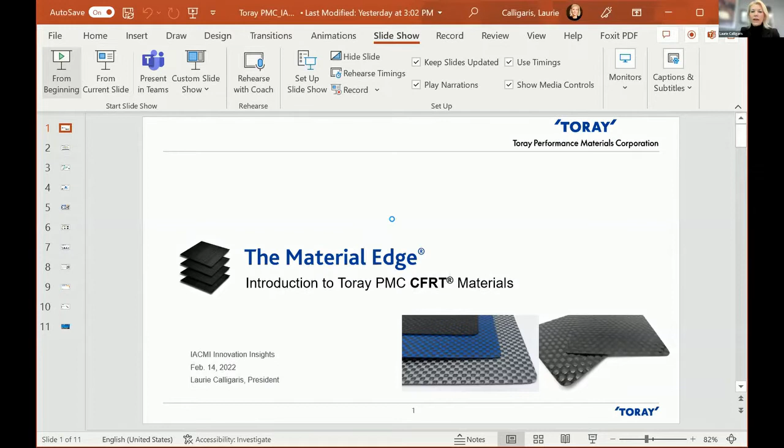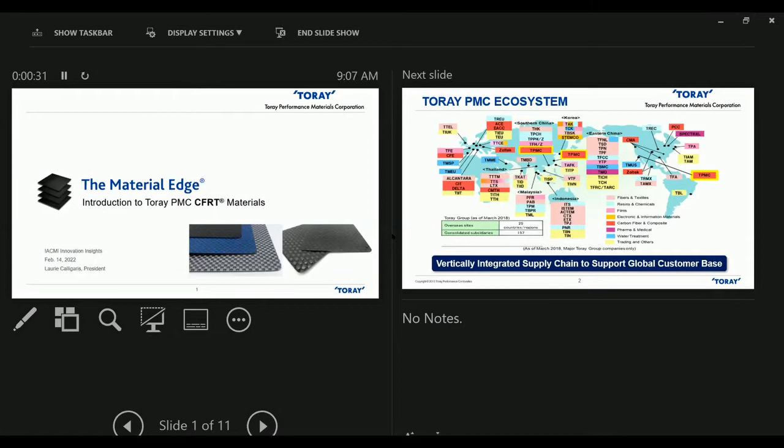Here we go. All right. Okay, how's that? Might need to either duplicate your slides or swap. We're still seeing the main, your edit screen. Hold on, I've got my technical expertise here.

We do this day in, day out. I don't know why it's a little bit different here. At the top of your screen you have a thing called display settings, and if you either duplicate - normally we do, right now we don't. Give us just a second here. Okay, hold on just a second. Page, extend.

Yeah, you blocked your monitor, that's why. You turn that off. What's going on here, huh? This is bizarre. No, it's nothing - it's because you had put the block on the monitor underneath the screen. You see a slash through your monitor on that one on the side. I'll share for just a second. Sorry, guys.

Somebody clicked on that block monitor or blackout. Oh, somebody clicked on the block monitor? Uh-oh, yeah, that's not good.

Not us, but I understand you moused over it and accidentally turned it black, so it stopped showing. All right, give us just a second. So you couldn't see it.

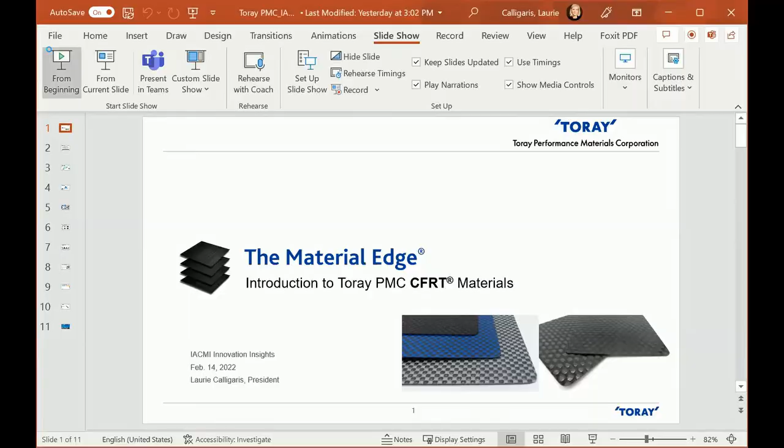I see what happened. Now you can see, hold on just a second. Yeah, you'll have to share again. There it is. How's that? There we go. Ready to go. Woo, finally. Oh my gosh, all right.

Thank you again. We're going to give you a little background about PMC because you're right, Dale, a lot of folks may not know who we are and how we fit in the Toray group. We were acquired about 3.5 years ago by Toray. So as we walk through the presentation, you may have seen or heard of our materials, and I promise you that if you've got kids who are teenagers, they're probably wearing some of our materials on their feet, okay?

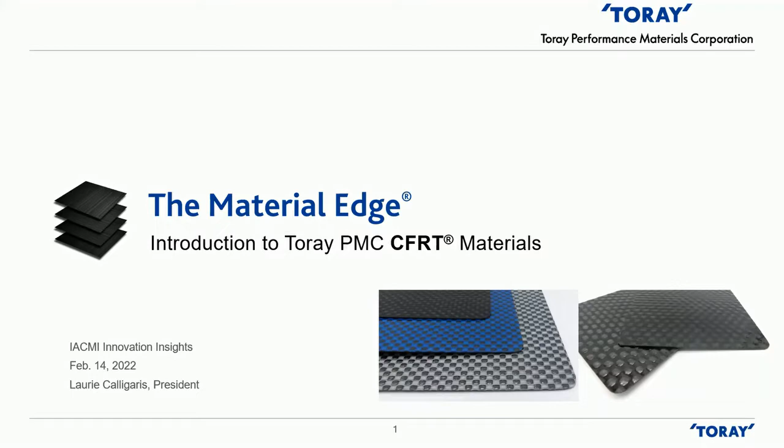So a little background. As you can see, Toray is a very global company, and we have a very global view of many, many industries. So we're part of this whole big conglomerate that you can see here.

In pink, we have the Fibers and Textiles group. The Resin and Chemicals group is in light blue. Films is in the darker pink. Orange shows the Electronic and Information Materials group. Red is the Carbon Fiber group, which we are a part of. Purple is the Pharmaceutical and Medical group. Water treatment, which includes the RO membranes, is the darker blue. And finally, we have yellow that represents the trading companies in each one of these countries.

They take care of a lot of the global trade issues that are very timely right now as far as carbon fiber and moving from one country to the next.

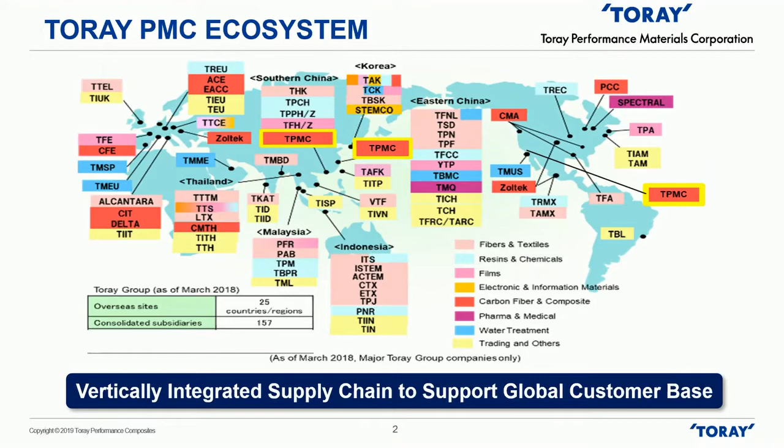So coming back to the carbon fiber group, which is in red, Toray is the largest manufacturer of carbon fiber on Earth, and we produce vertically integrated globally. This has really been a big advantage for us, specifically during COVID, and it's the ultimate supply chain security because we have the ability to manufacture in Asia, the U.S., and Europe. If you're interested in any of these other divisions, feel free to reach out to us afterwards, and we'll connect you with the right people.

Okay, this is our little slice of heaven for Kapil and myself. We're drilling down to our division here. We have manufacturing in Camarillo, California, which is where we're located today. This is where most of our composite sheets are made, with fabrication in Guangzhou, China as well. We have representative offices in Taichung, Taiwan, and sales offices scattered throughout the U.S., Europe, and Asia. Our teams have strategic locations, allowing for smooth product development, which has been very important during COVID.

I mean, I could say it was easy - we moved projects from one place to the next - but we all know this is simply not the case. It takes a great team to do great things, and we had folks working around the clock, day in, day out, on the weekends, where Asia's waking up and the U.S. has people working from home. We moved projects from one location to the next, and I'm happy to say that we did not cause any delays for our customers, from a project management and development standpoint, nor from a manufacturing standpoint.

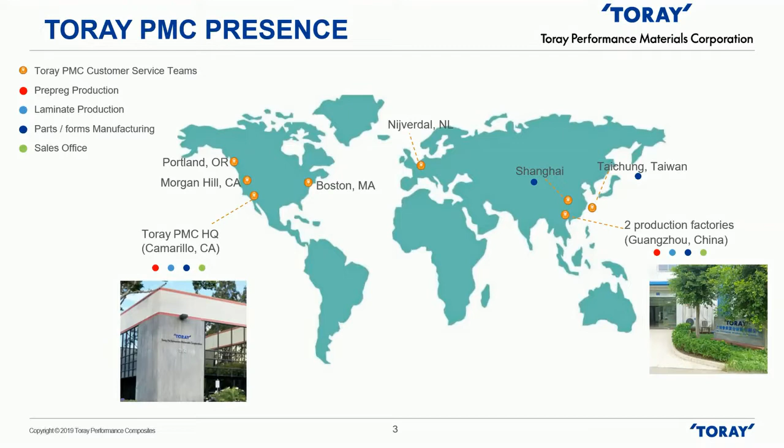Some common uses: nylon 6, our TC 910, is typically used for battery covers and seat structural reinforcements. The parts are compatible with typical polymers used, and they're easily injection overmolded for mechanical bond. Think about taking these unidirectional or woven materials and using them strategically, able to injection overmold and come out with the product you're looking for in the most cost-effective way.

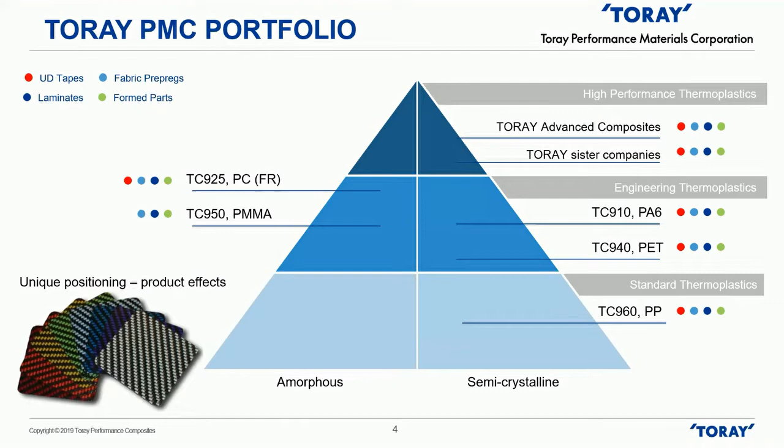The polymer and woven combinations with carbon and glass allow us to pigment the resin and provide beautiful color options. Unlike the nylon 6, polycarbonate, PET, and polypropylene, where resin systems are either black or natural, our customers enjoy the full Pantone ability of our PMMA resin system. The TC 960 polypropylene is best used for high impact and chemical resistance, and it's one of the lightest resin systems we work with.

All right, here's the markets that we serve. Having a wide range of polymers and reinforcements to work with launched our division into all of these markets.

It all began in the medical market in the 1980s with our proprietary PMMA acrylic resin system. The intention was to replace expensive thermoset custom orthotics with our CFRT materials. The benefit to the doctor was customization and modifications right there in the office, which added comfort to the patient. We then went from corrective applications to protective applications in the footwear and recreation markets.

This is when we developed our high volume manufacturing part process. Making parts, and this expertise came from our customers really not knowing what to do with our materials. The process is fine-tuned, and now we make millions of parts per month. We took what we learned in high volume manufacturing and applied that to the wider range of polymers we mentioned earlier to create materials, preforms, and products for computer electronics and industrial markets.

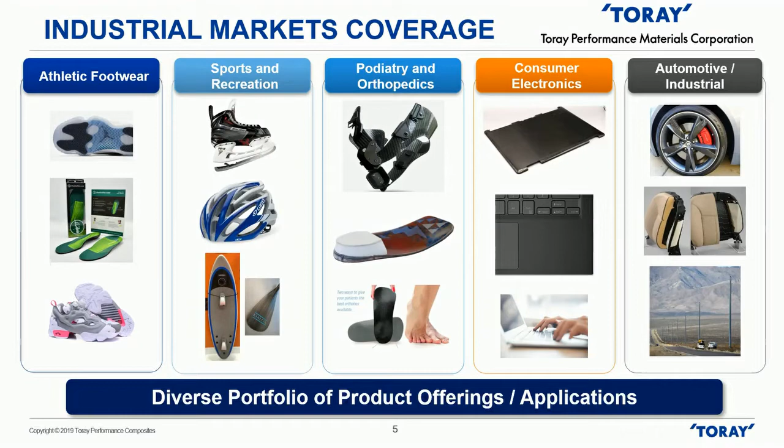So how do we do it? The first step is to make a flat sheet laminate, then cut the parts. We normally water jet 2D nested parts. The parts could also be stamped, but the water jet provides the most cost-effective option. The water jet produces a 2D nested product with high volume and high yield with almost full material utilization. This equals lower cost.

The material, or what we call a skeleton, left from water jet cutting - Kapil's going to talk about how we're creating new products from this post-industrial scrap later in the presentation. From the water jet, you see a 2D cut part. Again, these parts are cut literally in seconds, producing millions of parts per month.

Now we have a formed part, which we form either by vacuum forming, matched metal tooling, or compression molding. These are formed in seconds with no post-trimming needed. The part you're looking at was used as the final product, which was injection overmolded with a clear TPU. The black inside shot was the first shot into the part. In this case, this product has a tie layer.

We call this our EB, or EnviroBond 401, which is a TPU bonded layer. This was developed to eliminate the need for harmful solvents used as cleaners, primers, and adhesives. There's the final product you can see in the lower right, on the left-hand side, and the clear shot, which makes a beautiful part.

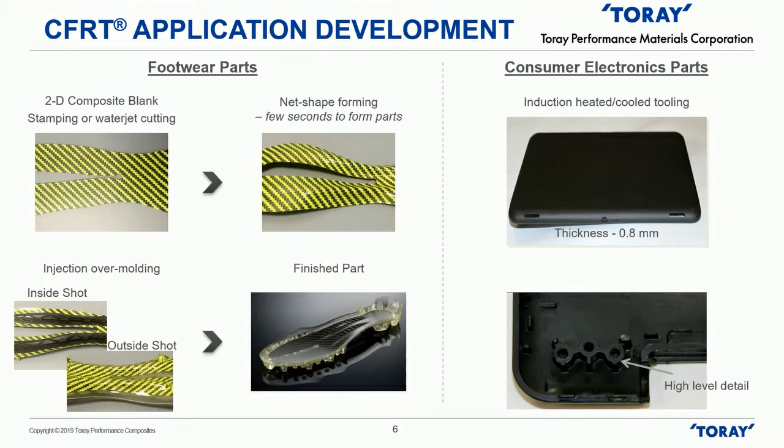And on impact, it leaves a slight dent, which the wearer could be alerted that the cap took a hit, and the footwear should be replaced. Unlike some plastic caps that crack, and you may never know that it's cracked, and then it could be tragic when the cap itself takes an additional hit.

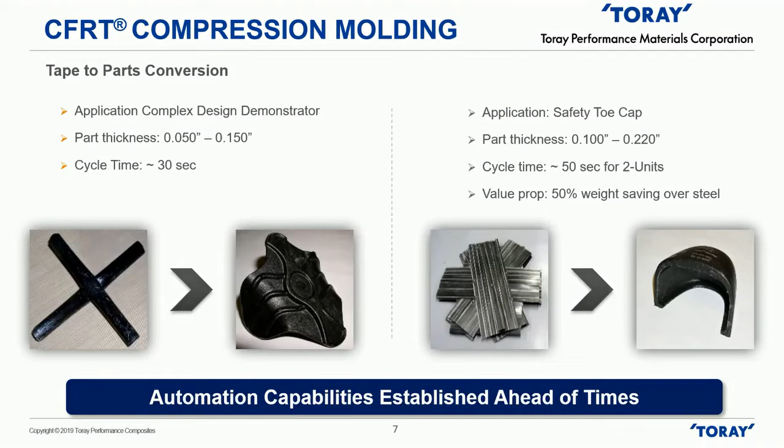Remember earlier in the presentation, we promised to talk about our sustainability. So I'm going to invite Kapil here to cover this area of our innovation.

Thank you, Laurie. Can everybody hear me okay? All right. Yes, we hear you.

Thank you. Okay, so the whole idea here is as we deal with our customers, but also looking internally, one of the targets that we have set up is identifying areas where we really can be heavily sustainable and focus on zero discharge as a target.

And referring back to what Laurie mentioned, the organization has already produced over a few hundred million parts, and that gives you a flavor of how much scrap we can generate in terms of the skeletons that come out of the water jet cutting process.

Not only that, of course, like any business, there are also certain scrap final parts for quality reject. So what we are focusing here, me and my team, is identifying really scalable avenues for us to take the scrap that is generated, and there's a lot of work, of course, happening globally. But what is driving us here is cleaning internally ourselves of the scrap we have, but also there's a very strong market pull that we see.

And some examples here that I'll be covering are based on the PMMA composite scrap, which is only one portion of what we do. The whole idea is really to take the scrap and then convert it into a workable form. In this case, really finding a good technology that can chop it up consistently.

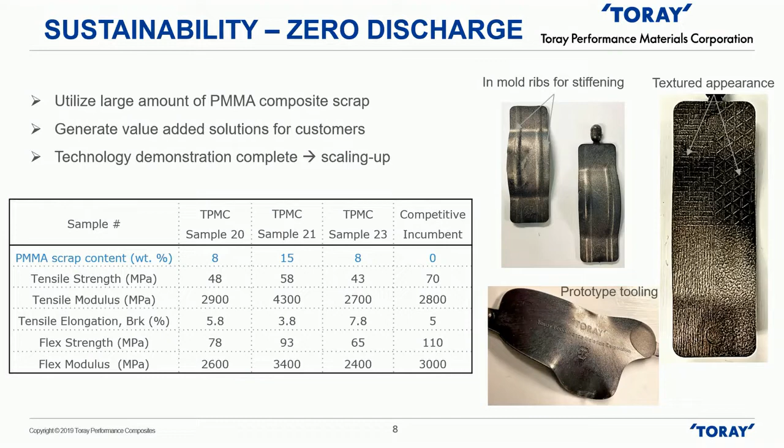On the next page, I'm going to cover two topics at a very high level. On the left, I'm talking about emissions reduction. I'll start at the bottom bullet.

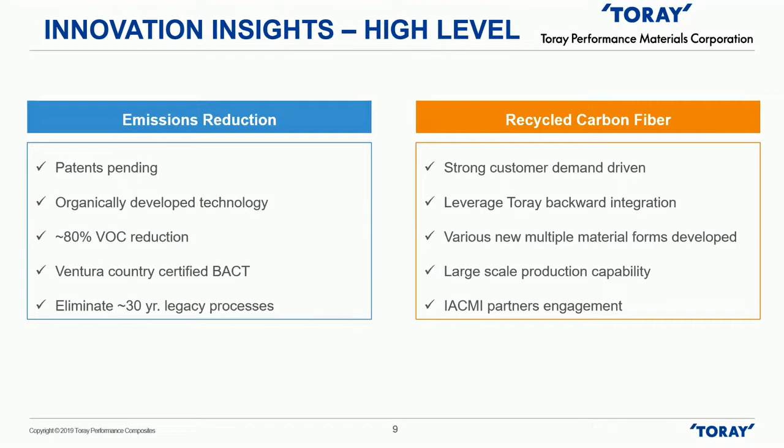The next topic is recycled carbon fiber. The whole idea is to leverage our backward integration into Toray and Toray businesses to access a robust waste stream of carbon fiber. Through that, my team and I have been able to demonstrate multiple pathways to create various material forms, including fibers for compounding and fibers for making very high quality non-wovens with 100% recycled fiber. Especially for industries like automotive, where IACMI is a very big player, the volume supply of very high quality non-wovens can be very sustainable. With that, I'll pass it on to Laurie.

We just have one or two more pages, this is basically it. Just to recap, we started out as a very small company back in the 80s. We were pioneers in CFRT. We started with our PMMA acrylic resin system, and from there we've evolved into an organization able to service a number of industries across several markets.

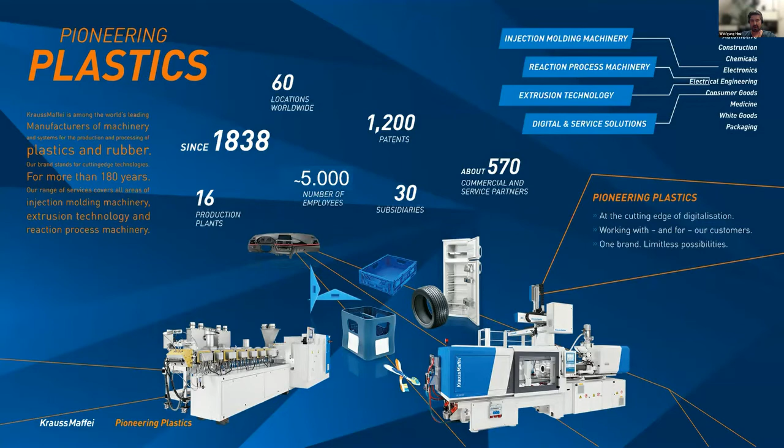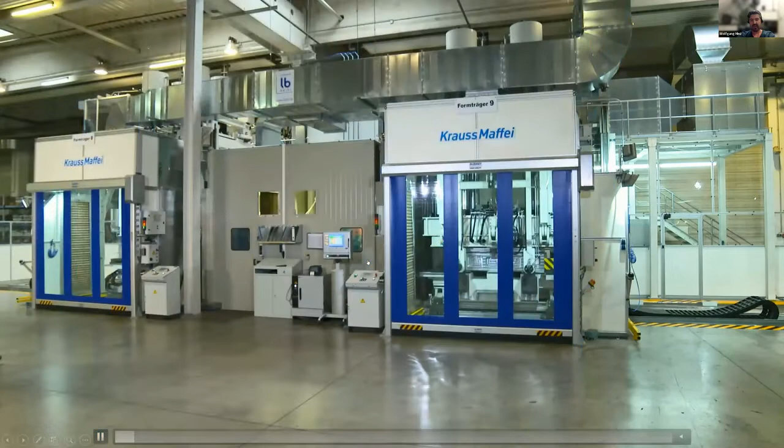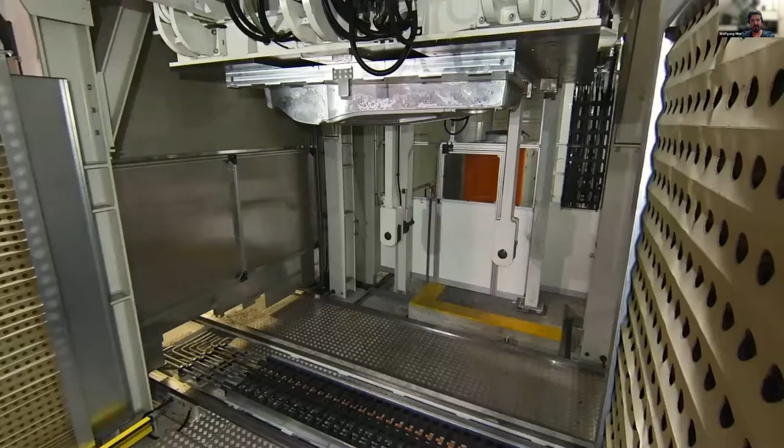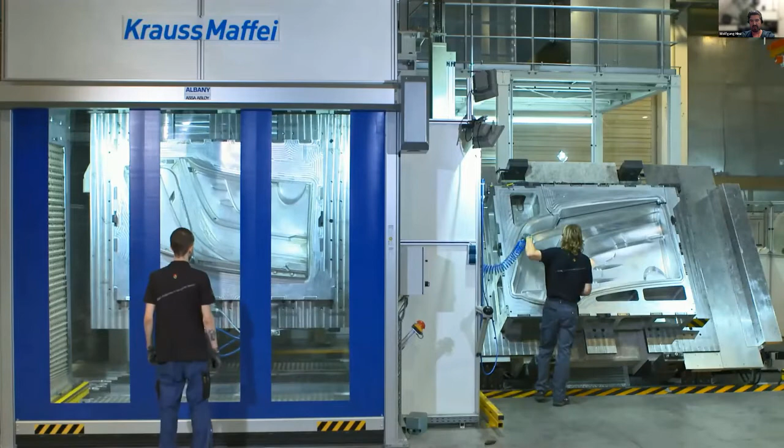I want to start with the technology long fiber injection, and therefore I have prepared a movie - we don't need the sound. This is one production line sitting at one of our customers in Germany, using the long fiber injection machine with 2 production stations. Here we see the upper and lower mold and 2 operators preparing the process. The right operator uses air to clean the mold, and the left operator sprays a release agent on the upper mold.

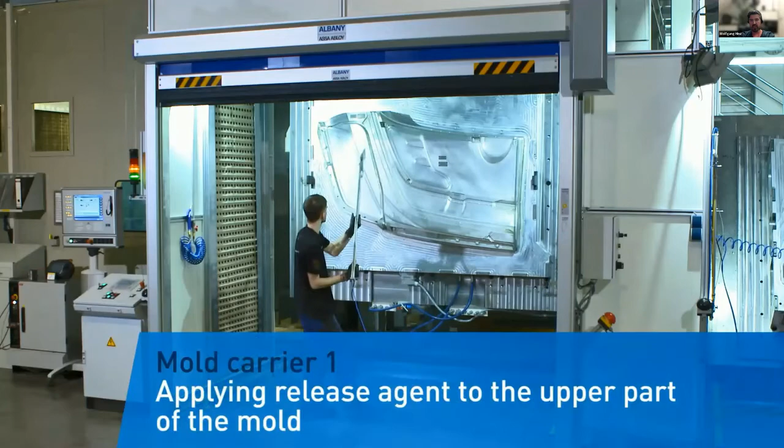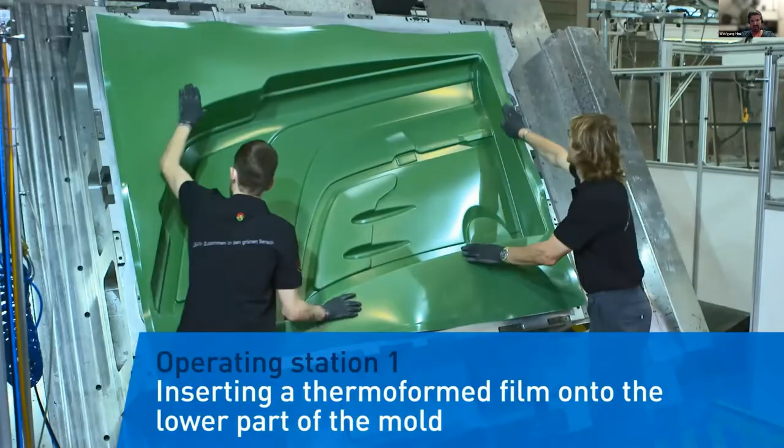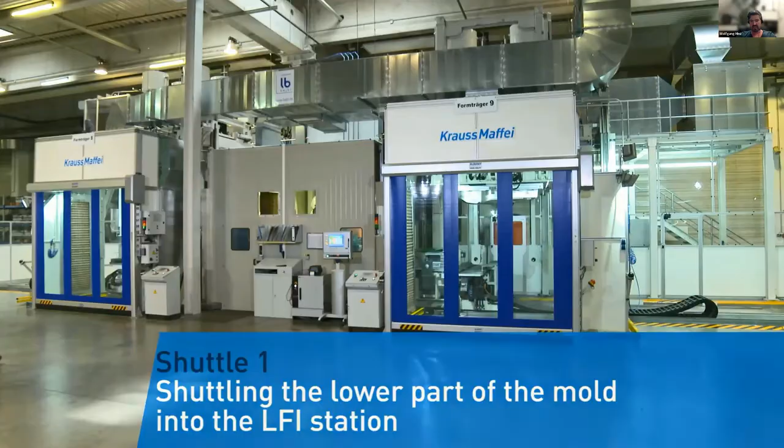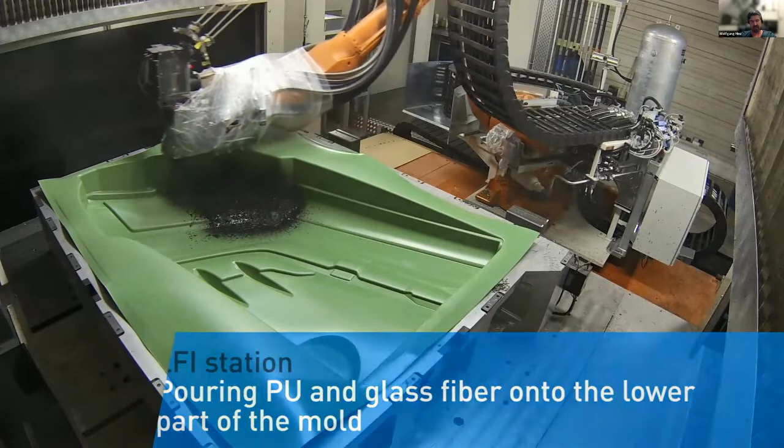You can also integrate some inserts. In this specific product, we are working with a thermoformed film, which is thermoformed in a previous step. We shuttle the lower mold inside the LFI spray area, where our mixing head is sitting, mounted on a robot. Then we spray polyurethane and chopped fibers directly from the glass fiber rovings, mix it in a mixing head at high pressure, and back inject it or back spray it onto the thermoformed foil.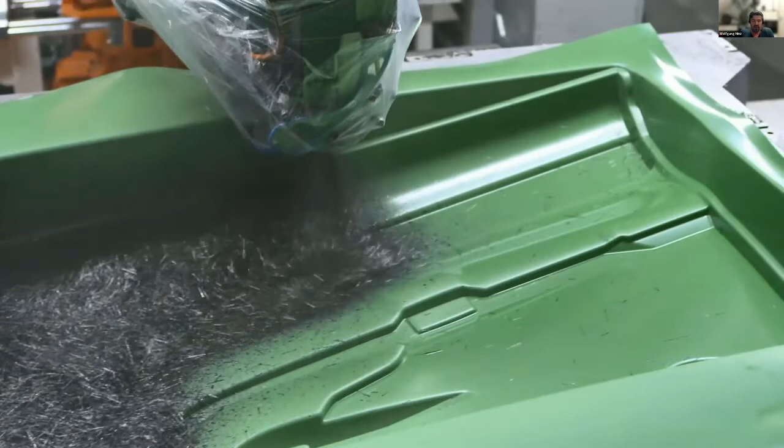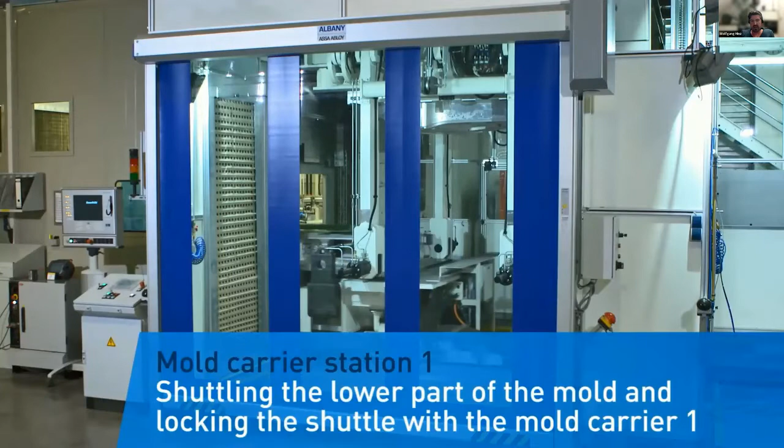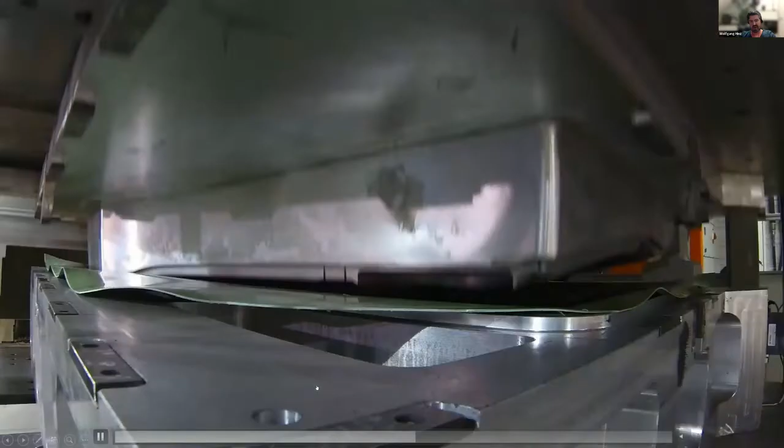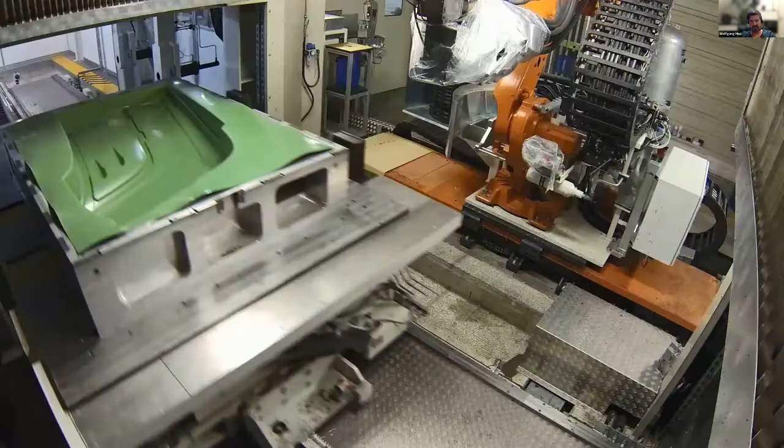The advantage is that you can adjust the fiber length and fiber volume during the process - this is really unique compared to SMC. Then you shuttle inside the press area and close the mold completely. Here we use very low pressures, only 5 bar in-mold pressure. So for example, for such a large part, you only require a 300-ton clamping force. While station number 1 is in the reaction process, on the left side a new mold shuttles in and uses the spray robot.

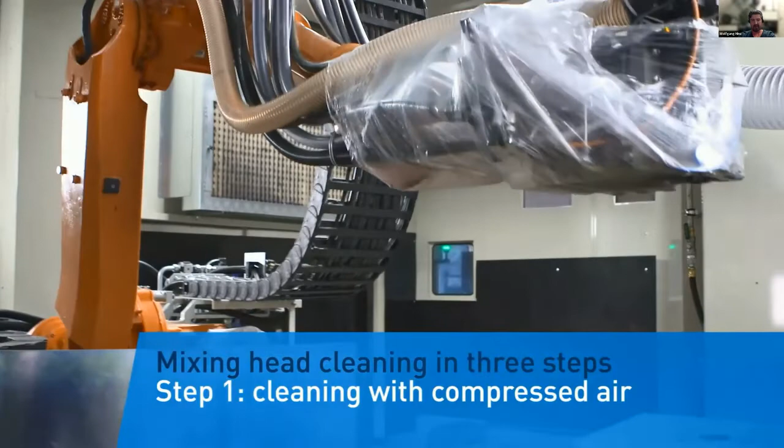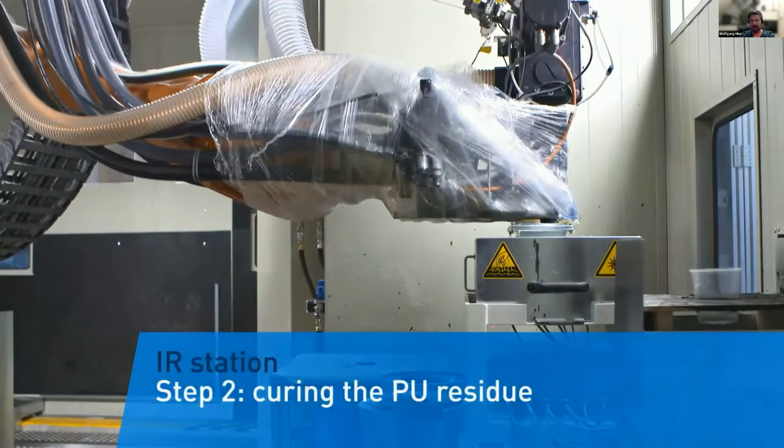I was mentioning it's a competitive technology to SMC. Why? Because on one side, it's more economical since we have lower investment for the presses and tools. On the other side, we are also lighter than SMC because we are not using many fillers, which make the SMC parts heavy.

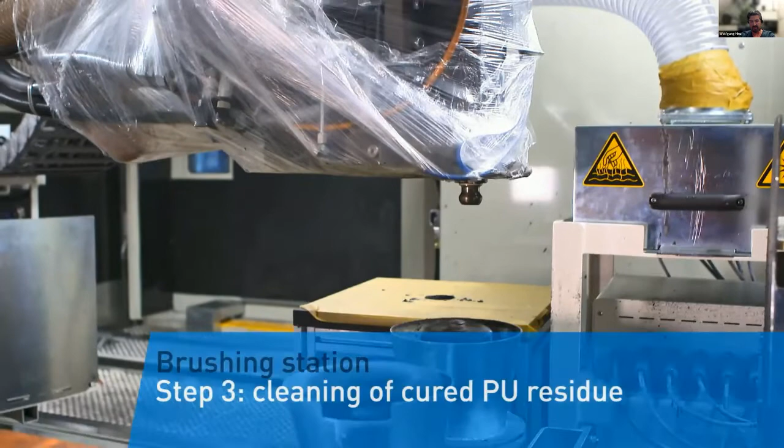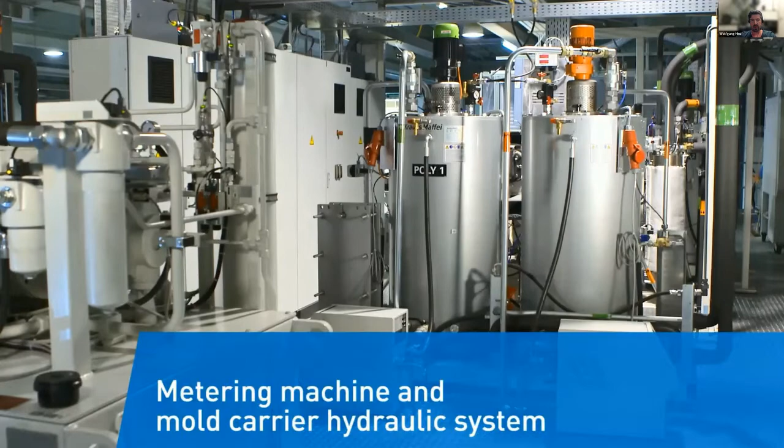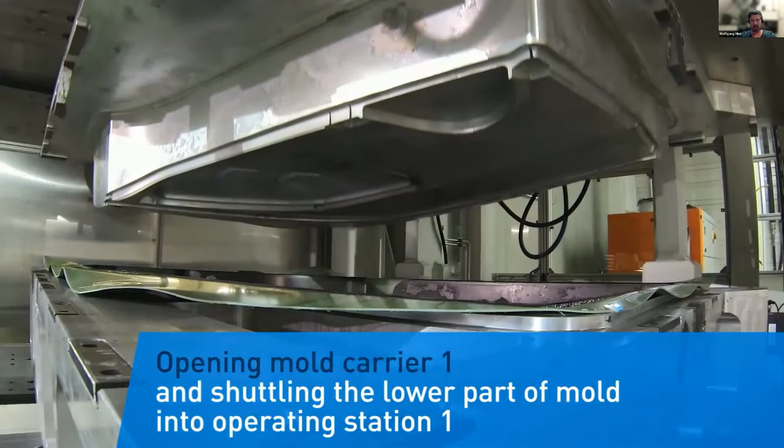Here you see the cleaning process, how we clean the mixing head automatically, so it's a self-cleaning process. Here you see our metering and mixing machine, which is constantly monitoring the components and the pressures. Once the reaction is finished, you open the mold. In this case, we are using aluminum molds.

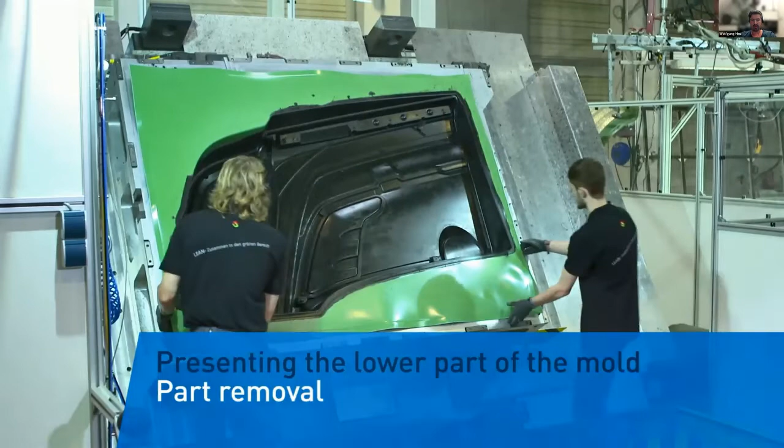You can demold the part and put it into the next step where you do the final edge milling. In this case, what you have seen here was a side panel of an agriculture vehicle.

What is unique about the LFI technology? Basically, the base material is polyurethane, and in most applications it's mixed with glass fibers, but you can also use carbon fiber or natural fibers. Therefore, we are specifically developing a new carbon fiber cutting device, which will enable new products and new applications. So polyurethane with fibers is the standard application.

What you also have seen is that we are using it in the spray area. You can combine it with different fillers, so you can premix it in the polyurethane to reduce part costs, for example. You can integrate some cores, for example honeycomb papers, aluminum honeycombs, or even foam cores, inside the process to further reduce the weight or increase the performance.

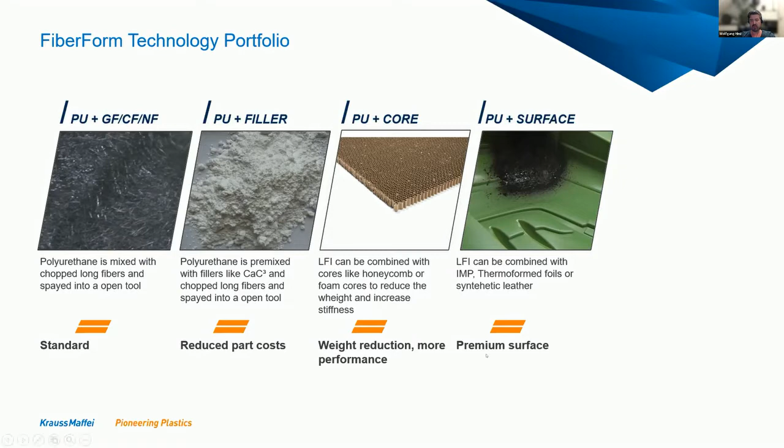Or you can combine it with different surface technologies. In the movie, you have seen a combination between LFI and thermoform foil, but you can also combine it with in-mold painting if you have to change colors more often, or you can even use synthetic leathers to achieve a premium interior part.

Here you see typical parts our customers are producing: interior covers, engine covers, roof covers, side panels, body covers, bumpers, and so on. As I was mentioning, the base material is polyurethane, so it's a thermoset. Typical cycle times are 3 to 15 minutes, depending on the part size. The typical production volume, where it's one of the most economical composite technologies, is between 3,000 and 50,000 pieces, depending on part size. The driver is really the ratio between mechanical performance and costs.

What are the USPs Krauss-Maffei can offer? We were the inventor of this LFI long fiber injection technology, and we have a 20-year technology advantage compared to our competition. You can adjust the fiber amount and length during each part, and we are also the market leader here because we have the most serial production experience.

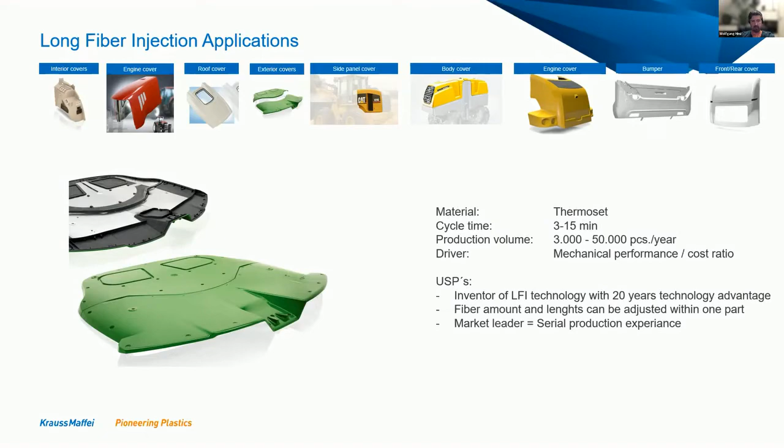Coming to the second technology called FiberForm. Here we are switching to a higher production amount, and not with thermoset. Here we are using thermoplastics.

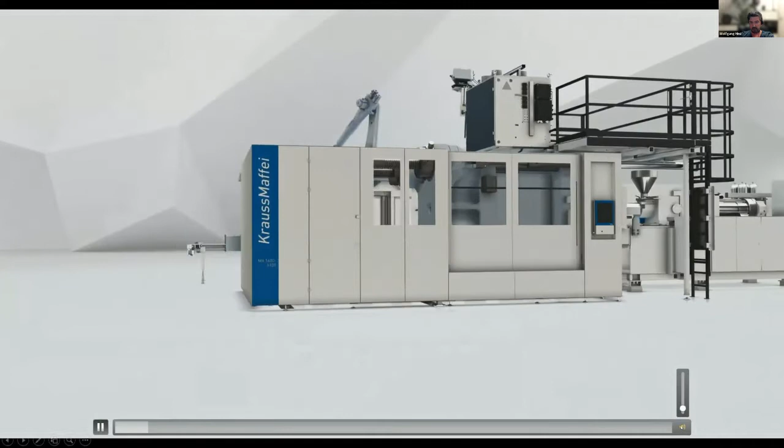I switch off the tone again. Oh, sorry.

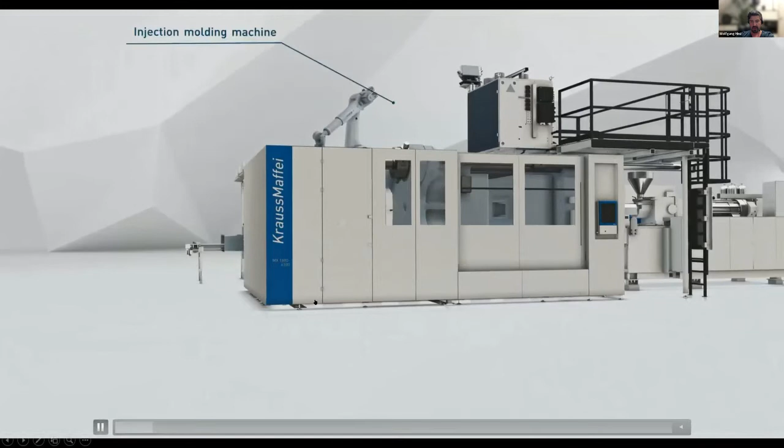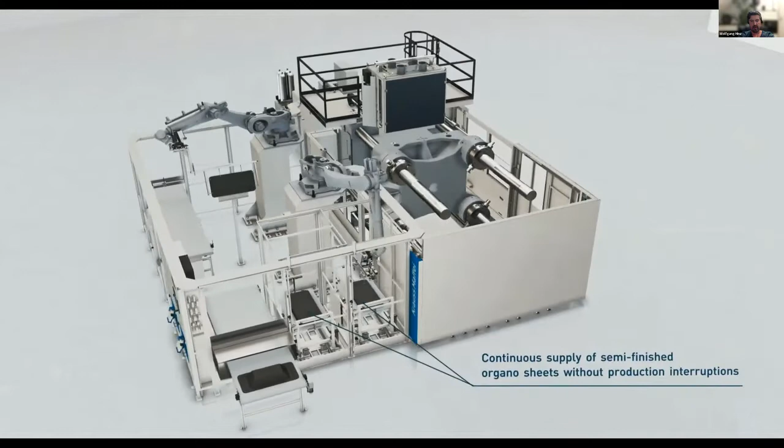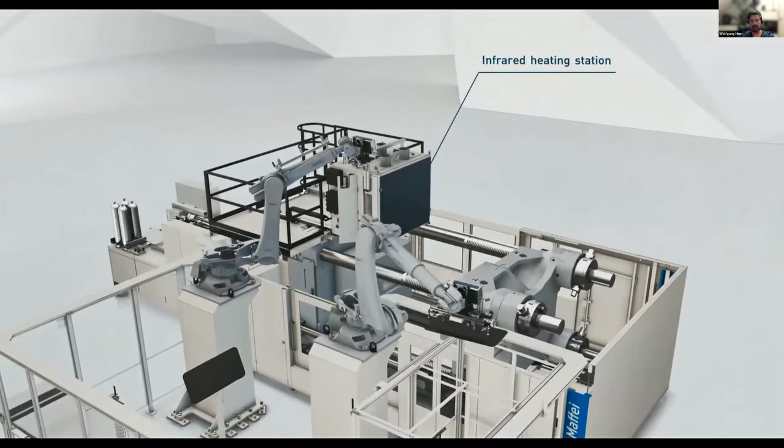So here you see the overview of the FiberForm cell. Here we are combining an injection molding machine made by Krauss-Maffei with automation using, in this concept, two industrial six-axis robots for the handling. You have a material feeding station where you store your organosheets, for example, or your intermediate composite sheets. Here we have a centering station, and the heart of the process, our patented infrared heating station. At the end, we are using conveyor belts for quality assurance and also to move the finished parts.

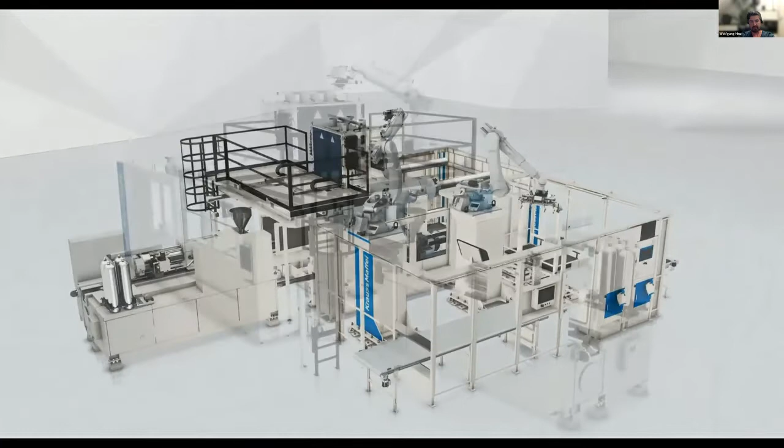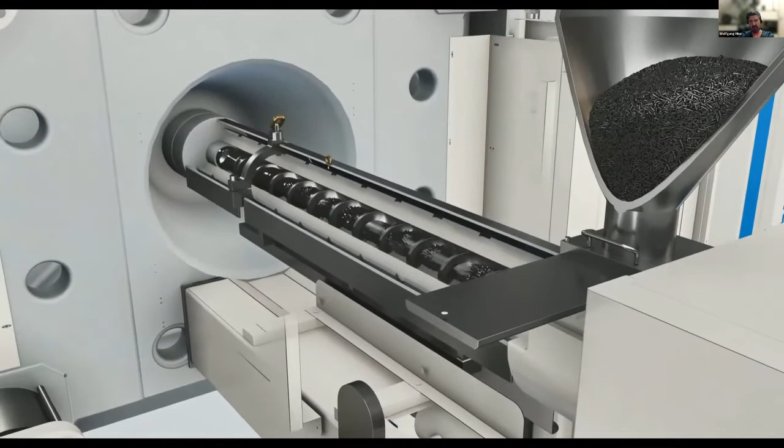So when we are looking at the process, here we have a high performance screw, which is melting the thermoplastic pellets to back inject it onto a preformed organosheet, for example. You can also use, for example, recycled carbon fiber and mix it inside the process.

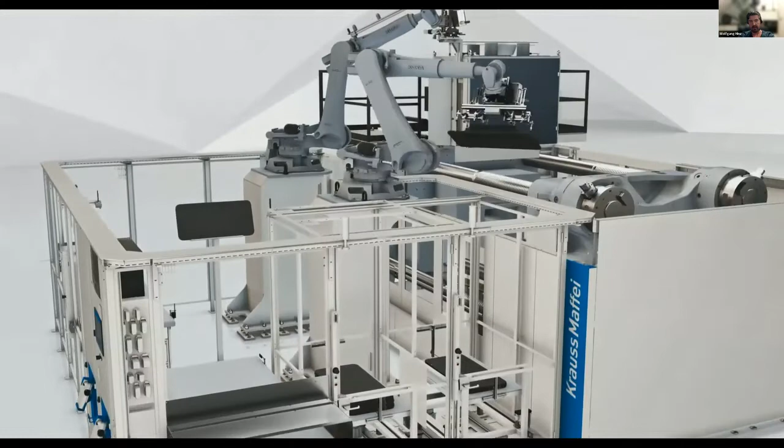Here you see the demolding of a finished part and positioning it on a conveyor belt. And now we are starting a complete cycle.

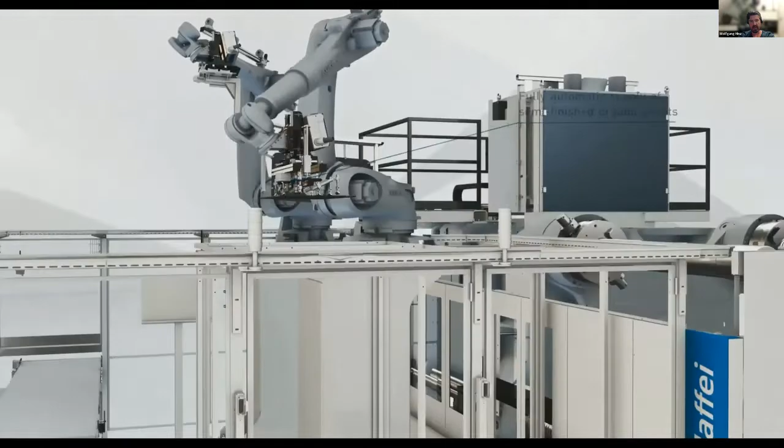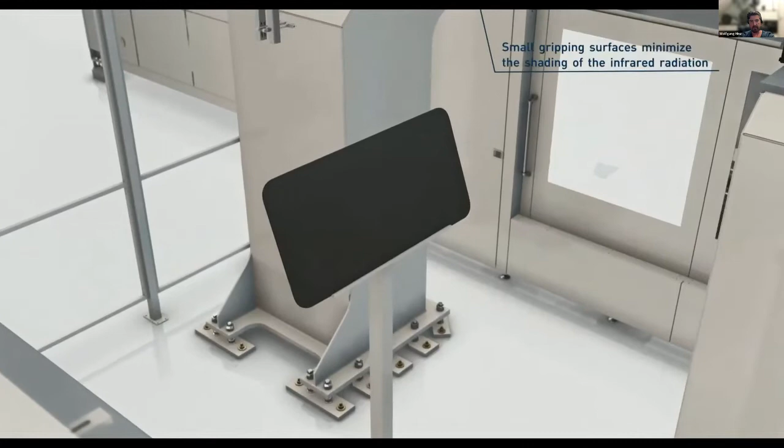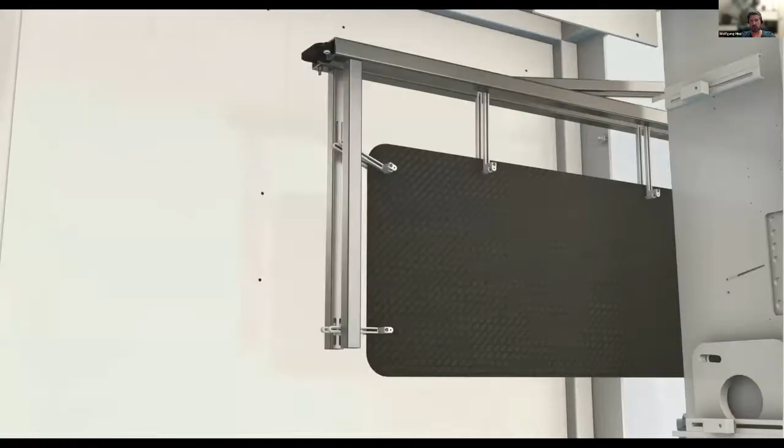So the robot with a gripper is taking the organosheet, putting it on a centering station so that we always have an accurate position in the mold. Then the second robot is coming, moving this organosheet into the infrared heating station, where we are measuring the temperature and applying infrared heat to make sure that we have an equal temperature distribution over the complete sheet in a very quick time.

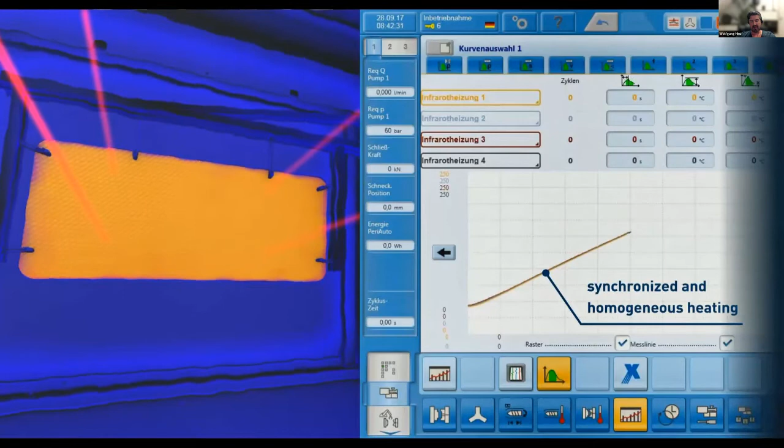At the same time, the injection molding machine is positioning the mold to a position that it's almost closed. Then we are taking over the preheated sheet, preforming it, and back injecting the thermoplastic system.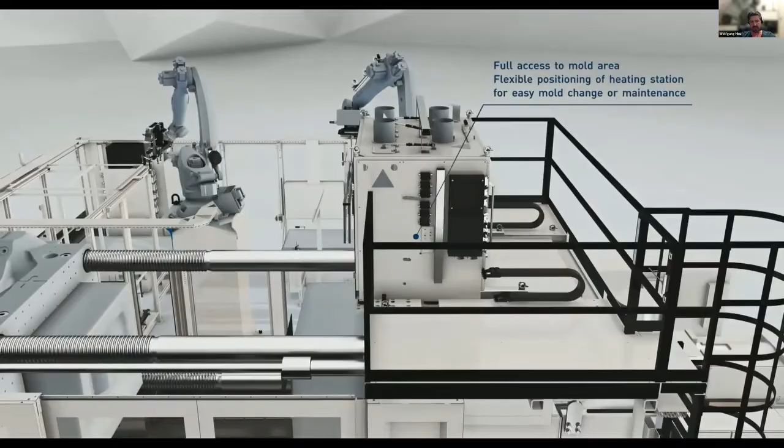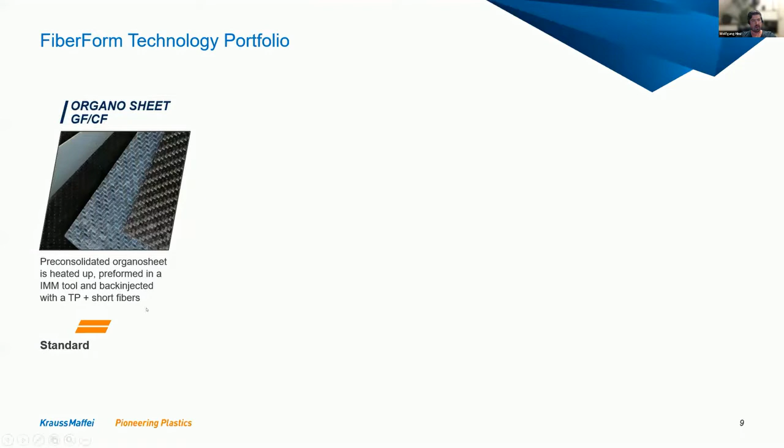After that, we are removing the part and putting it on the conveyor belt. So here is the same, that we can combine it with different materials.

The standard is that you're using organosheets, either with glass fiber or carbon fiber, which is a pre-consolidated organosheet that you heat up and back inject either with polyamide or with PP, for example, and you can also use short fibers.

You can produce your own sheet with the tape laying method and use this preform in the fiber form process.

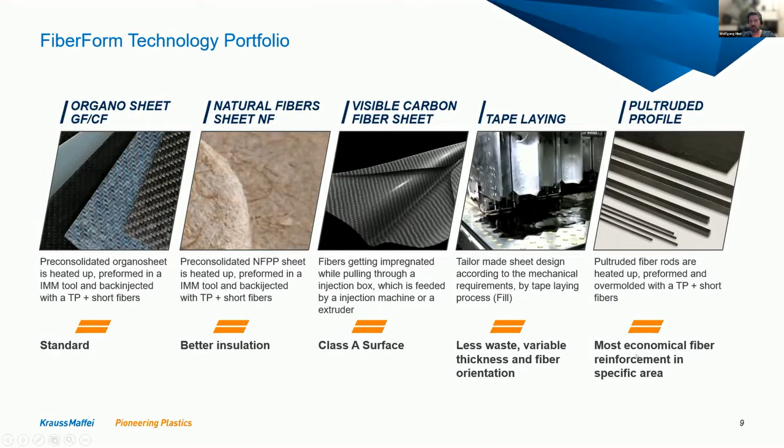Or the latest development is using thermoplastic pultruded rods, heated up very quickly and integrated with the fiber form process, which is the most economical method, and you only use the reinforcement in the area where you really need it.

Typical applications are here, for example, most of our customers are out of the automotive industry: door panels, seat shells, lightweight carriers for the entertainment system in the car, airbag housings, or structural parts, but also armrests.

What is also pretty new are underbody shields to protect the EV cars, so the electrical batteries, firewalls, and so on. So the driver here is really a high production volume and a weight reduction.

Here we are using thermoplastics with a cycle time of roughly 60 seconds per part, and the technology is suitable for a production amount higher than 100,000 pieces per year. For less than this amount, there are also other technologies which could be more competitive.

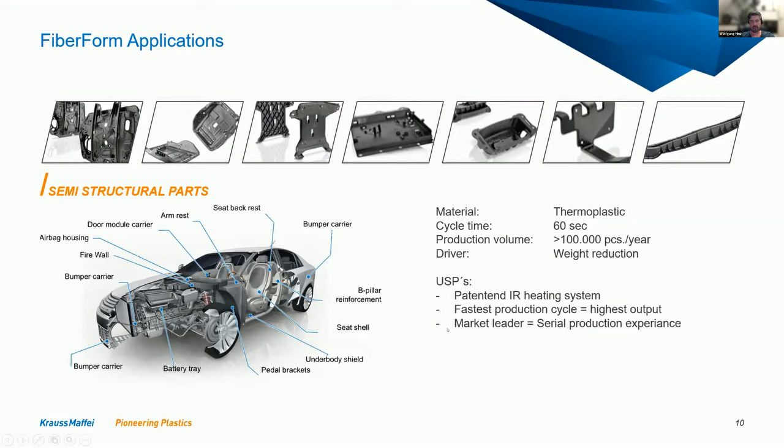What are the USPs from Krauss-Maffei? We have a patented infrared heating system. We have the fastest production cycle on the market because of our unique production cell, so therefore we have the highest production output. And we are also the market leader in this technology because we have the most serial production experience.

That's it from my side. Thank you very much.

Thanks, Wolfgang. There's a question in the chat, I think it relates to the LFI process. Can you use carbon fiber? I think you said that you can. Yes, you are doing that. And then who in the US is using the LFI system? Are there any companies you're aware of or recommend? We have certain customers who are using it, but I don't want to mention any names here. You can contact us directly, and then we can give you some names.

No question. Have you using PU? Can you use epoxy? For the LFI process? No, not yet. There is a method where we are not spraying the polyurethane, where we are laying the epoxy resin on top of the fibers, but that's another technology. We call it wet molding. Right, wet compression molding, I've seen that in practice at BMW. Yep, yep.

You talked about using calcium carbonate, things like that. Any work done using glass bubbles to lower the density, like you get with low density SMC? Glass microspheres, yes. There were some developments ongoing, not in the LFI technology, it was in another technology, but in general it's possible. We were working on this for several years. The problem at the beginning was to get pressure-resistant glass microspheres, but we have solved this, and it's available now. Okay, thank you. You're welcome.

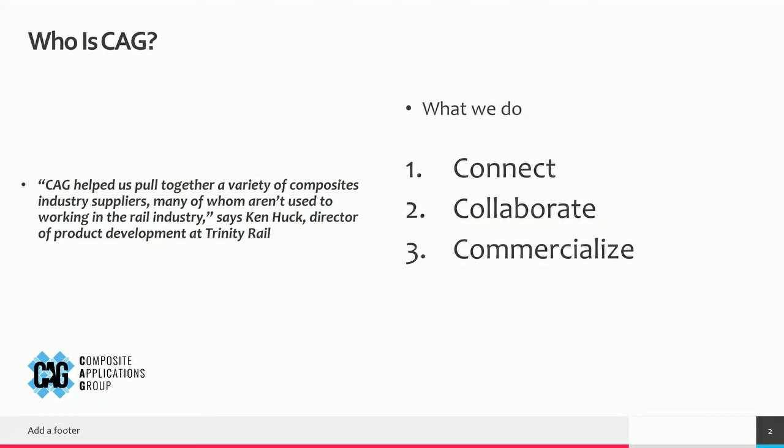One of the things we did, as everybody in the US is aware, infrastructure is a big deal. If you've driven on our interstate systems, you realize the bridges and roads are in desperate need of upkeep and repair. Being aware of that, and that composites are not necessarily new to the infrastructure world, we decided to take it a step further.

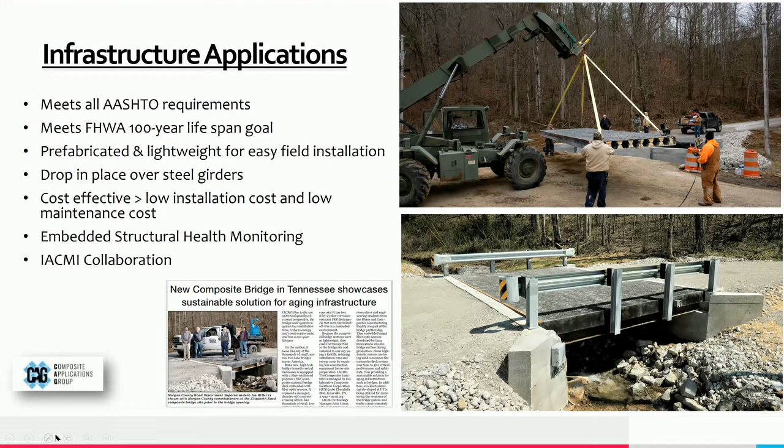This is a project we're continuing to scale. You'll see more development in this area in the future, and it should hit several national headlines as it continues to grow.

Another one is the 53-foot composite refrigerated trailer. This project really was the genesis of the Composite Applications Group.

Our founder, Jeff McKay, was approached by Wabash - I believe it was 2016, or maybe 2013, I'm not sure when, but it was a while ago. Wabash approached Jeff McKay and said, do you think you can convert a traditional trailer into a composite trailer? And Jeff said, absolutely. After he promised that, he then had to go figure out how to deliver. And that is where Composite Applications Group came from.

This trailer, you can see the benefits here. It's 30% more thermally efficient compared to their previous technology, 25% lighter. This is all the stuff you're going to hear from composites - we're lighter, we're stronger, we're better thermally efficient. But really, if you look at that bullet that says cost neutral compared to current construction, that's critical. Composites are typically a more premium material because they offer premium benefits. Now, if you can capture those premium benefits without a premium price, then you're really in a unique situation.

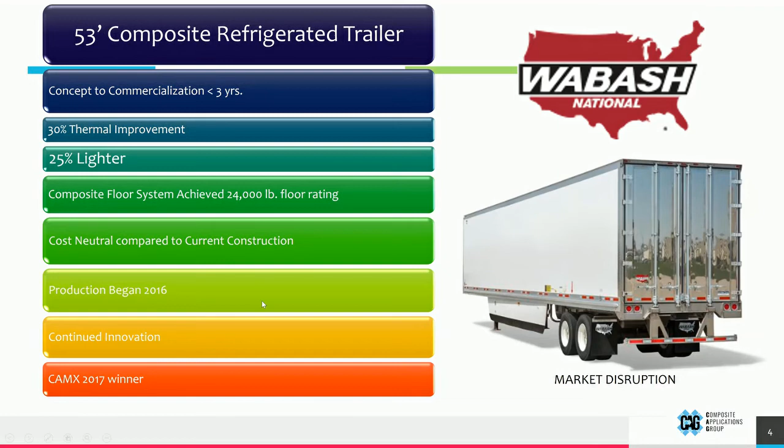Production actually began in 2016, and we won the award for CAMX in 2017. I'm proud to say that with the Trinity project, which we're talking about now, we actually won the 2021 CAMX award. So we're shooting 100%, 2 for 2, being able to not just provide innovation, but provide innovation to companies that need it - they can commercialize it.

This is what I was talking about as far as the structure of how we work. We focus around the OEM. We find a composite technology, like structural composites, and surround that with the supply chain needed to bring that technology to market for the OEM. So the structural composite Prisma beam that you saw on the bridge is also the backbone of that trailer. That's because it's a polyurethane foam, which has a high insulation value, but it needed to be surrounded with glass, surrounded with resins, and surrounded with application equipment in order to make that possible.

That's not a supply chain familiar to Wabash - at least it wasn't when we began the project. But by partnering and collaborating with these companies, we were able to bring that about and do it in a way that Wabash is now fully invested into composites technology. If you follow Wabash on the stock exchange, you'll see they're doubling down on that investment. They believe composites are the way of the future for the trailer industry, and they're going to continue making investments to see that succeed.

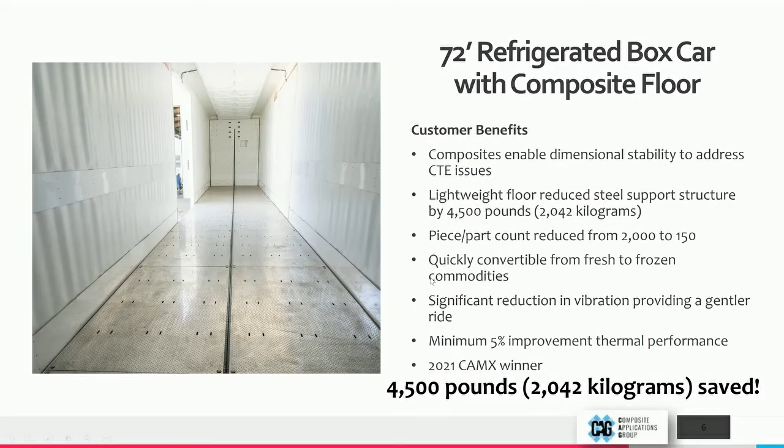On the right-hand side, I don't have the picture here that shows it yet, but it comes up in a second, showing the reduction in parts. There's a drastic reduction in the amount of fasteners needed, the amount of connection points needed, because the amount of material that's going on there has been reduced. And that's critical in order to achieve a commercial path.

And again, you'll also notice that there's aluminum used here. We're not saying that this entire structure needs to be made out of composites, because that's not necessarily functional. Then you're going to start leaning into heavier or more expensive materials, and the commercial path begins to get murky when you say everything has to be out of composites.

For those of you listening, I took a glance at the list of folks participating. A lot of you guys are composites professionals and have been in the industry a long time, and we're very fond of committing and overcommitting and claiming a lot of really interesting things. What that ends up doing is putting us into a corner where we become enemies with some of these other materials as an industry. In cases like this, it needs to be more collaborative.

It needs to be a true composite, right? You're blending a fiber-reinforced thermoset or thermoplastic material with something more traditional like aluminum or steel. That's really where you're going to find the most success.

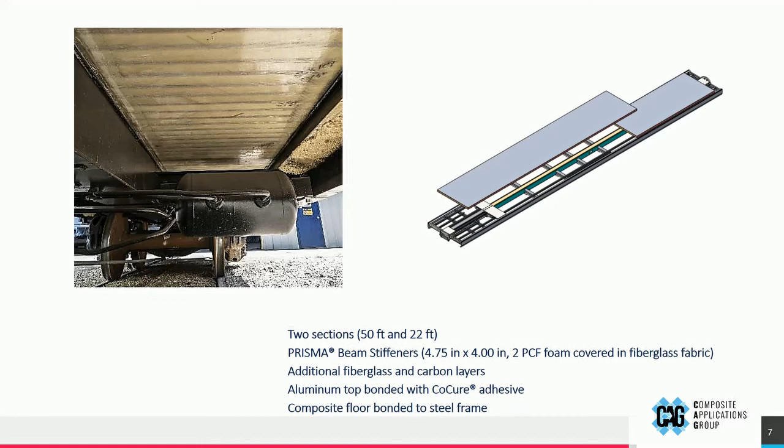And that is only achieved through collaboration. You can't just throw all the spaghetti at the wall and hope it sticks. It has to be achieved through collaboration, and that's something we pride ourselves on. So the companies we partner with are non-competitive, and because of that non-competitive nature, people tend to be more engaging with their conversation, and their collaboration becomes more robust.

Here's some pictures of the inside. You can see that Prisma technology on the bottom right-hand side. That's the floor that was at the CAMX show. If you were at the CAMX show, you probably had a chance, if you went to the award section, to see that floor being showcased.

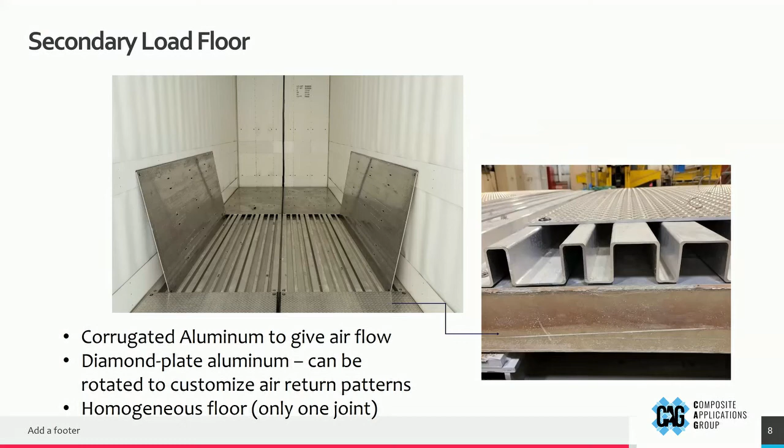There has to be a full hybrid design that takes into account the strengths of composite materials, the strengths of fiberglass and resin, the strengths of that particular resin. And you guys in the composites industry know how complicated that can get when you try to determine what type of resin marries with what type of glass, what the sizing is on that glass or fiber.

Is it going to be a biofiber? Is it going to be a bioresin? What are the additives inside that resin to accentuate some of the strengths and characteristics needed? It's a very complicated supply chain.

So I can't just go down to the local hardware store and pick up some 440 stainless and call it a day. I have to sit down with my engineers, sit down with the team, and collaborate on what's going to make this successful, and what different components need to be applied here in order to achieve that new design, to get a hybrid model that lends itself to the strengths of both materials, from the composites and the metallics, or the thermoplastics or the wood fibers, or whatever it is that they're assembling the structure with.

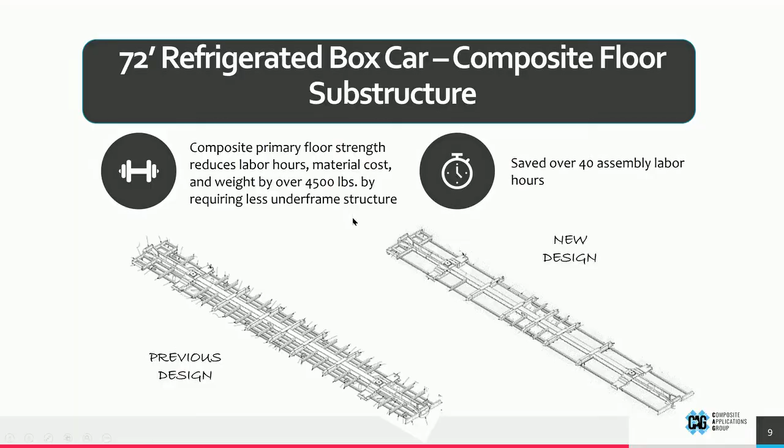So that's really what we do. I didn't see any questions pop up in chat, Dale, but that's the conclusion of my presentation. I hope that was helpful. This is something we work really well on, and we really appreciate the form and function of IACMI, because we're really parallel in how we approach things, and being able to work with IACMI and help them on some of the projects they've been doing has been excellent.